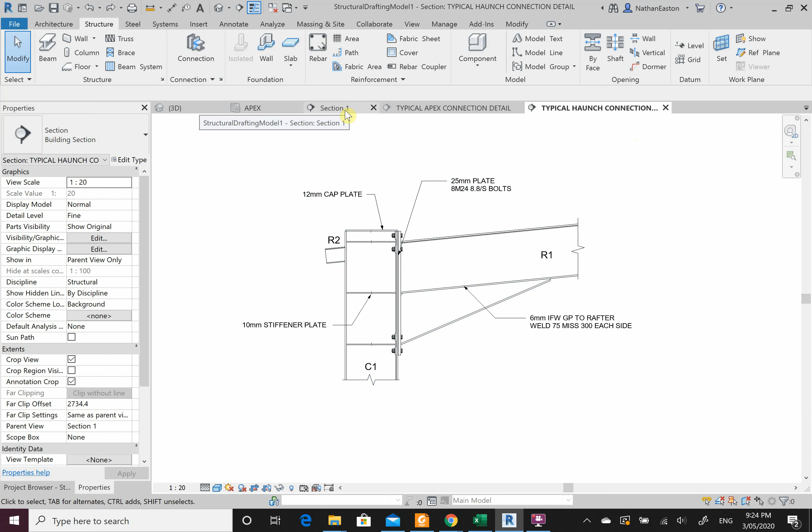So let's come back to our section. I'm just going to rename this while we're here to be our portal frame. Right click, rename - this is our portal frame.

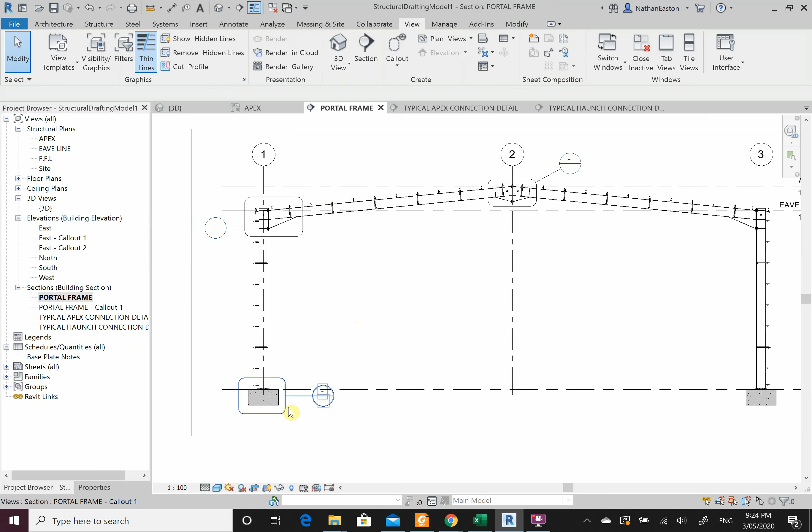Now what I need is a detail about our base plate. I'm going to come to view, call out, and put one around here. Right click, go to view.

What I need to see here is I need to firstly change my scale to 1:20, detail level to fine, graphic display as shaded - just like everything else.

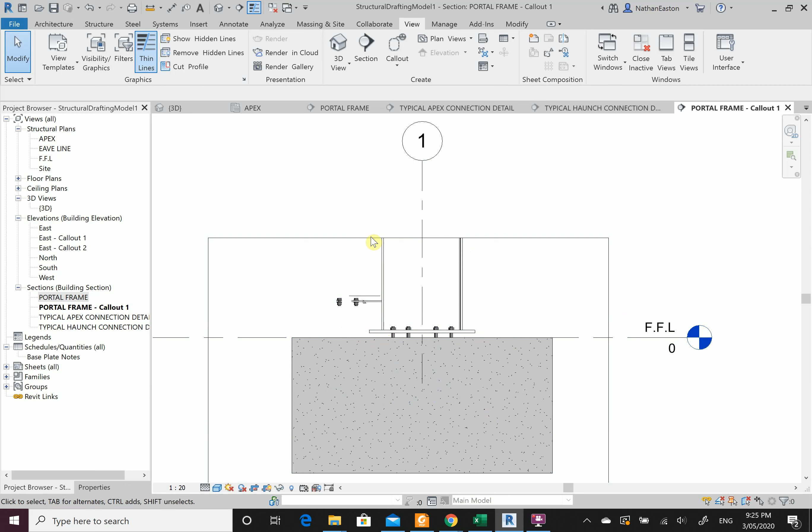Now I don't need to see the girts here. All I want to see is my column, my hold down bolts and base plate, and my pad footing. So I'm going to hide my grid line - I can bring it back and use a center line down the track, we'll get to that after. And what I'm going to hide as well is these girts, I'm not interested in seeing them just yet, they don't add any value to this detail. So I'll just tidy this up.

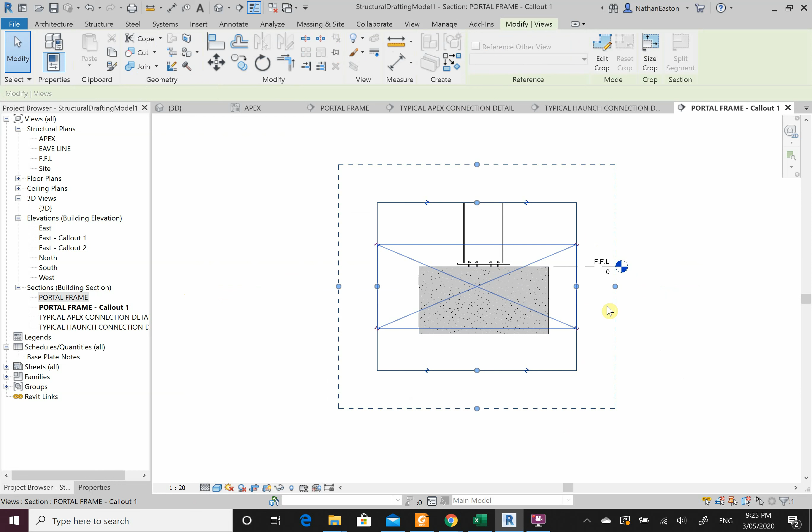Now what I'm going to do is increase my area for my annotations, and then turn off my crop region. So what I need to do is be able to see these bolts through here, and put in some bottom reinforcement.

So I'm going to select my pad footing. Now I know we haven't covered concrete yet, but we'll go through this now, and then get into the nitty-gritty details of concrete in the next couple of weeks. So we can specify structural material, we can put in say 32 MPa concrete - I'm not going to worry about that as of yet.

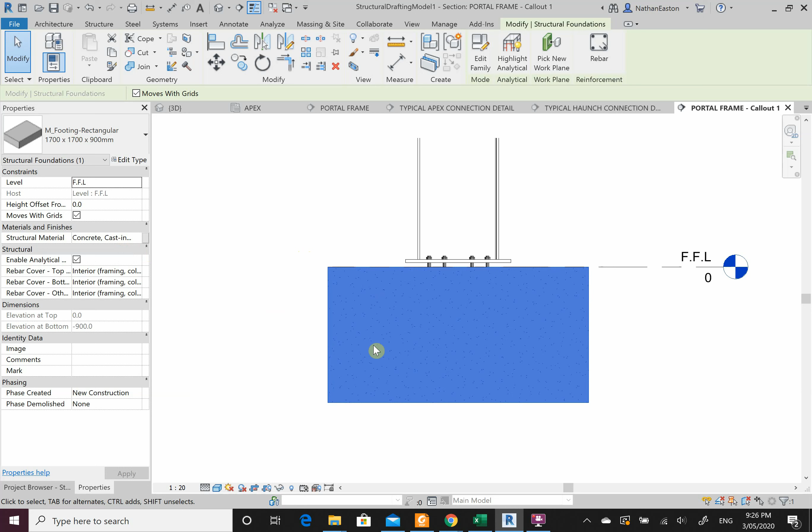What we're going to do is make it transparent. So select it, right click, override graphics in view by element. You can do this from your visibility graphics, so VV or VG, or go through the view tab and grab it that way. Now all I'm going to do is make it a little bit transparent so I can see the bolts. Go OK.

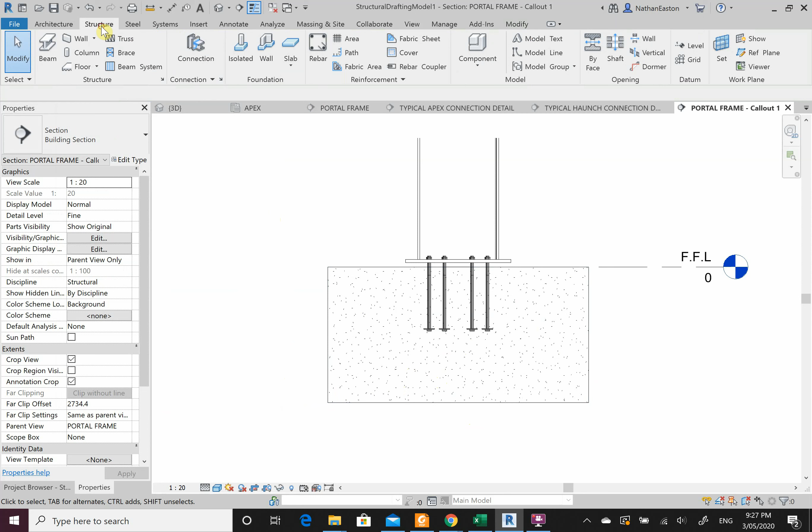And now what I'm going to do is put in some bottom reinforcement in here. This is going to be all under tension, this bottom area below the neutral axis. So I need to go structure, rebar.

Now what I can see in here is I have all these shape M's. So by the looks, I don't have an Australian family loaded in here because I know the rebar shape S is what I'm after for the longitudinal bars. So I can use this rebar shape M for the longitudinal bar, just a round circular bar. But in my properties, what I can see is I don't have my N bars - my N12s, N16s, N24s, N32s. I haven't got any of them. So what I'm going to do is load shapes.

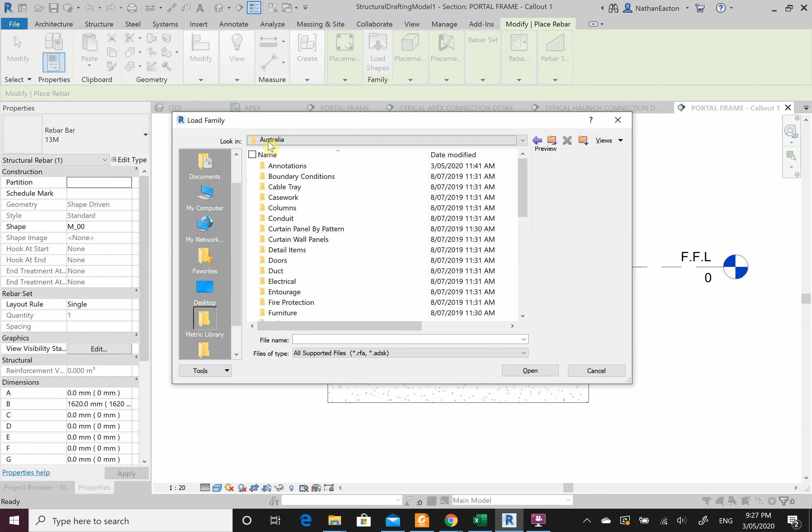This here is going to be Australia. I come down to structural rebar shapes, I'm looking for my shape S. Okay, go open.

And this is okay. So the first thing I want is for the bars to run in the X direction, so parallel, so I can see it like this. Okay, I need to change my properties - I'm after an N12, so N10, N12 bars.

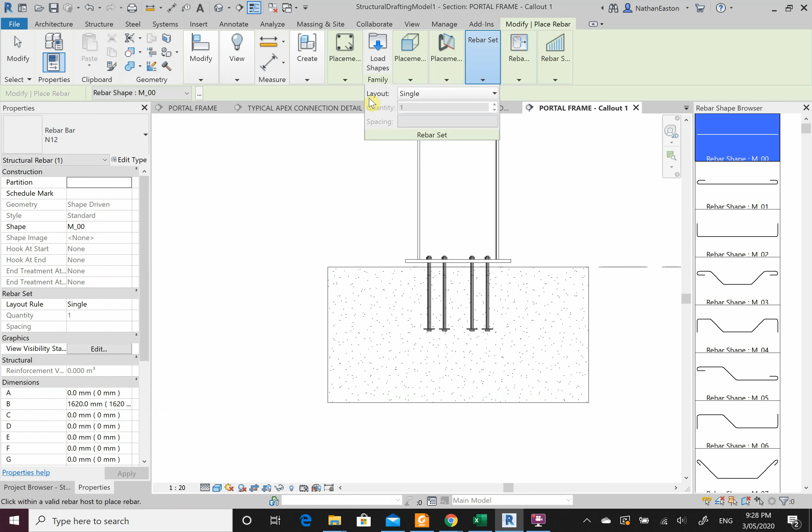Now this will, if I place this here, give me one bar. So I come to my modify tab, go to my rebar set, my layout, I'm going to change these to a maximum spacing, and I want each of my bars to be 150 centers. All of this information will be given to you by a design engineer.

Now I'm going to put the bottom ones here in one direction. Now this is a 3D object, and this beam or this pad will bend in 2 directions, so I need to reinforce it in 2 directions.

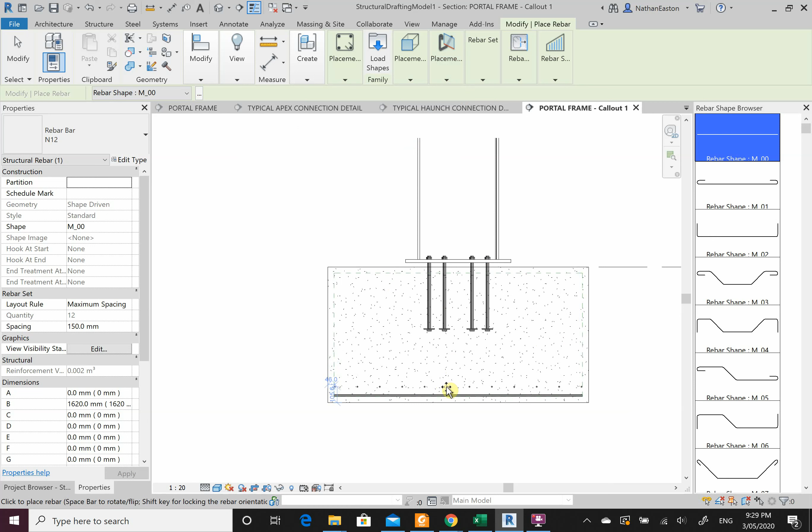So I need placement, and I change my placement orientation to perpendicular to cover, so I can see my bars in the opposite direction, kind of like our slab mesh. So I'm going to place these on top of my bottom bars, and that will be okay - that would be 150 centers in one direction and 150 centers in the other direction.

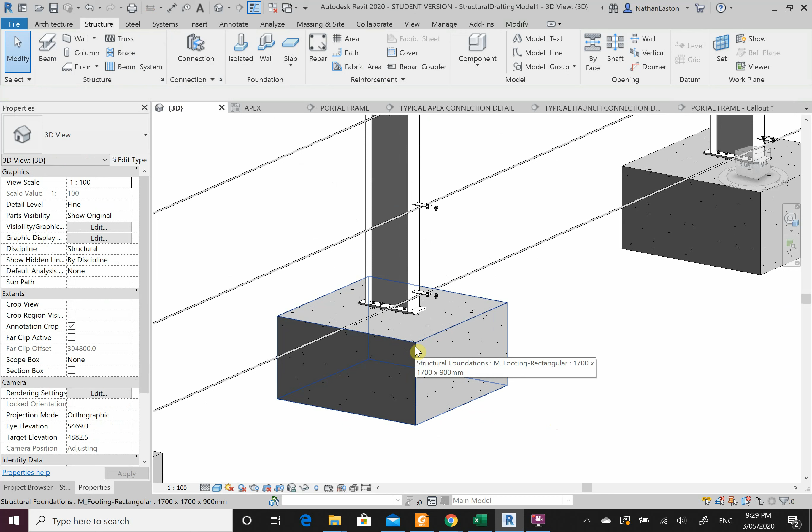So if I come to my 3D view, it should be this footing here. So I'm just going to show you what it looks like. I'm going to make my footing transparent to start off with.

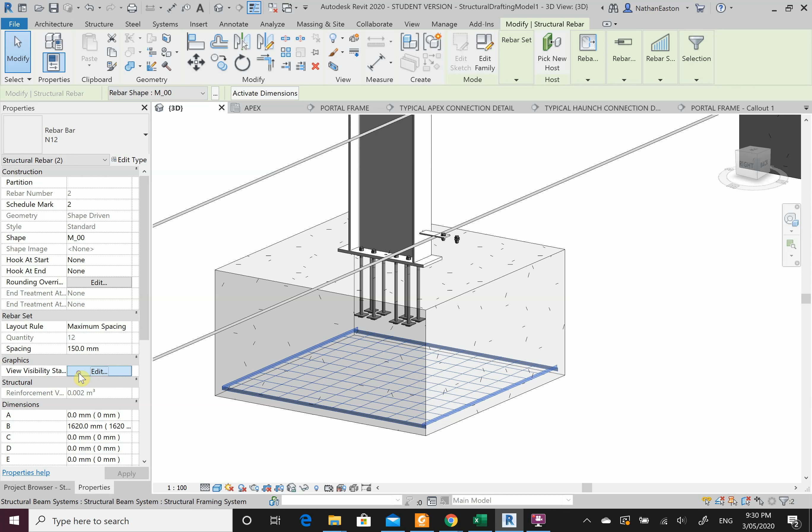And then I'm going to select these bars. Okay, we'll get into this when we do it a bit more concrete, but as we can see, this is very much in 2D, just lines. It's actually 3D bars. We come in the properties, graphics, there's view visibility states, we edit, and in my 3D I want to view as solid and view unobscured.

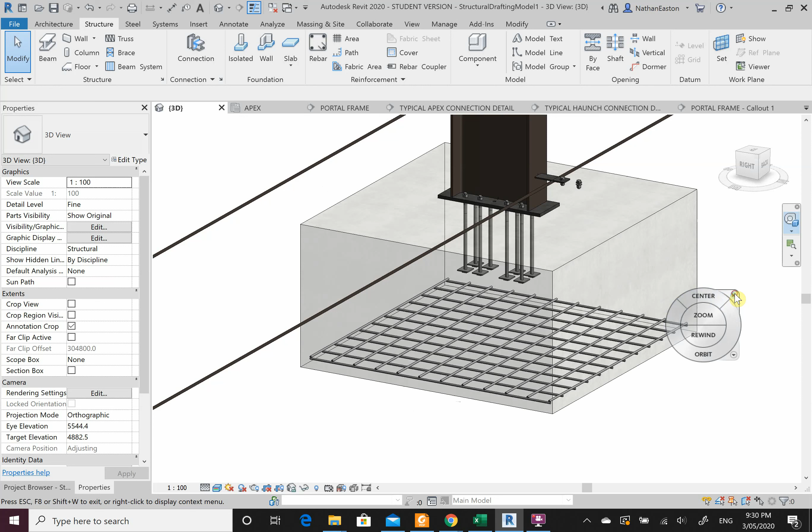Go OK, and now I can see these as an actual grid. I can make it realistic and the bars will show a bit better. So this is how they look in here. So they are 3D bars overlapping on top of each other. Okay. So we can come back to our detail.

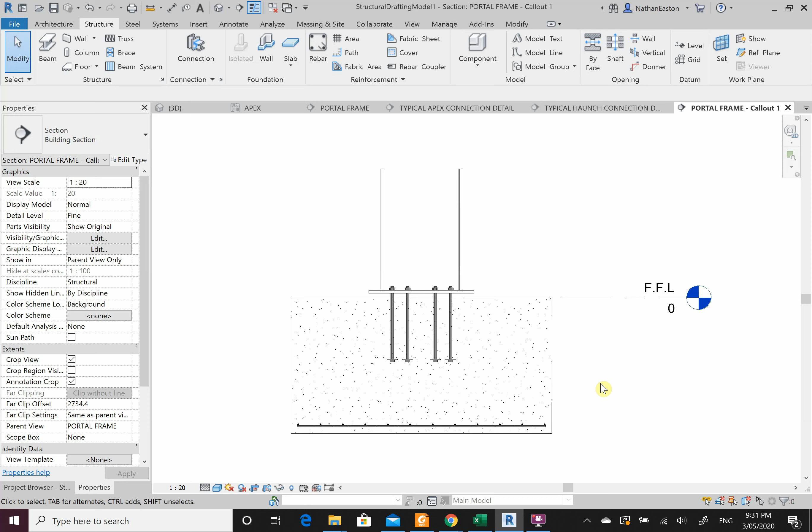Okay, now we've got everything in here that we need to start putting in some text. So this column here is column 1 or column type 1. We will have separate pad footings because we have smaller ones for our second columns. If you remember from our 3D, these pads here is what I'm talking about. These pads and columns are different to these pads and columns.

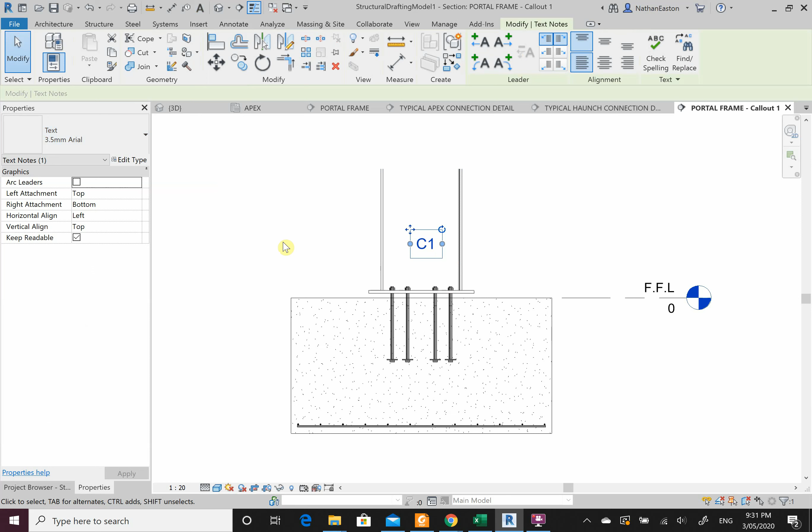So what I will do first is annotate text. And this one here is C1. Okay, and it's also going to be 3.5 millimeters in height. C1. Okay. Now, what I need to do is start to detail the rest of it.

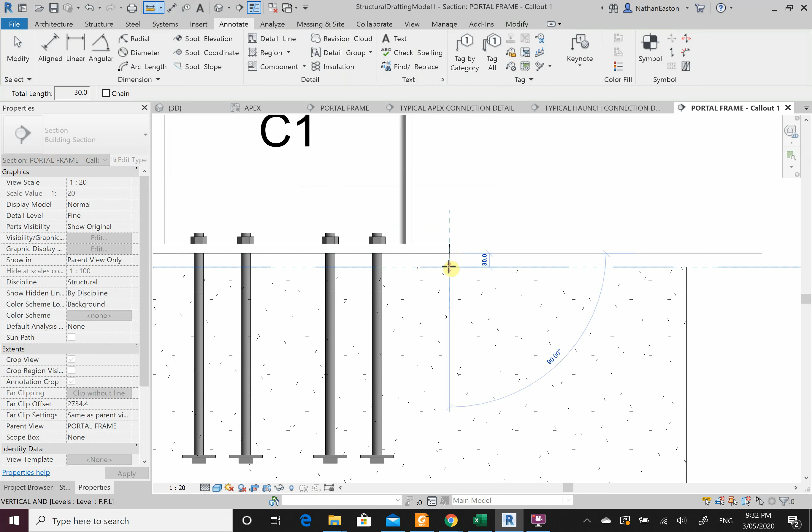So, text. Now, remember we have our base plate, and underneath our base plate, we have this non-shrink grout that we have to use. So I'll just double check. I think we've used 30 millimeters. 30? Awesome. So I will go text, and I have 30 millimeters non-shrink grout. Okay, I'll move that up a little bit. I'll put a leader to the left, and my non-shrink grout is sitting down here.

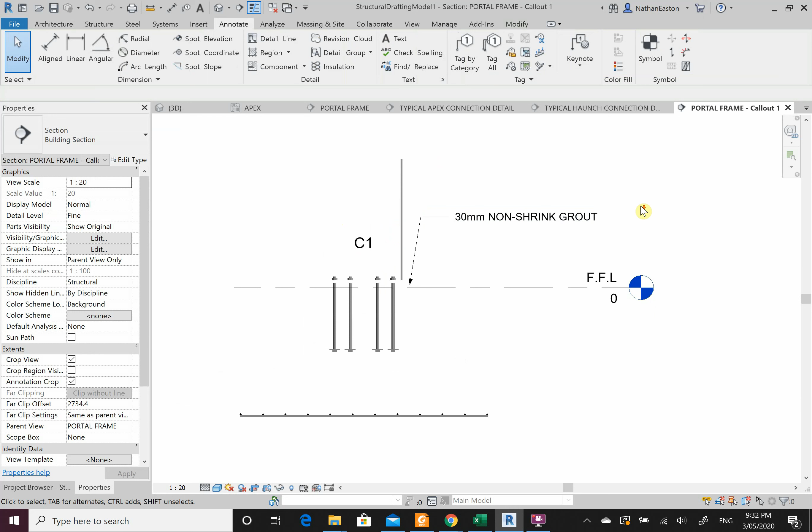Okay. My base plate, which is here. If I go tab, I can pick the actual plate, check my thickness, it's a 20 millimeter thick plate. So TX, what I have here is a 20 millimeter base plate. Leader to the right, and that's this plate here that I'm talking about.

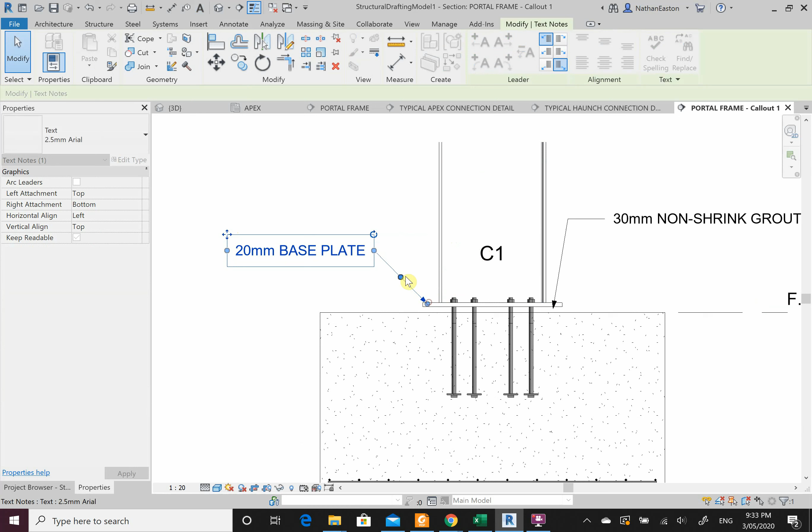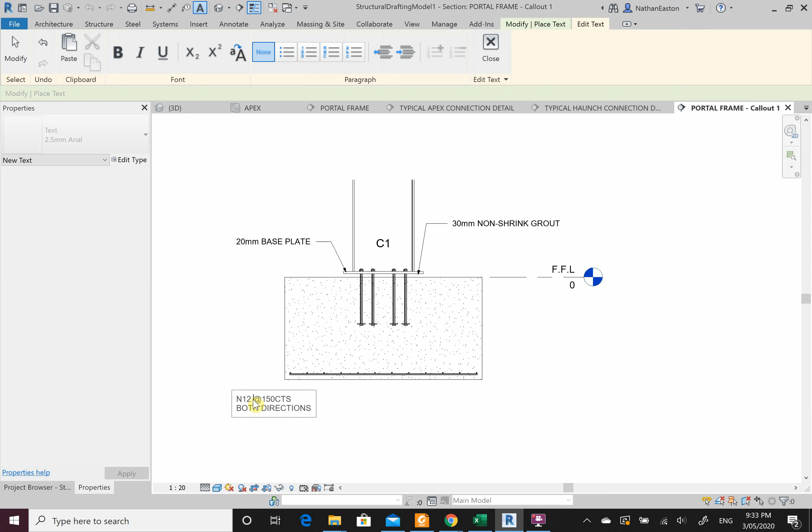Awesome. So the next thing I want is I might specify my bottom reinforcement here. So TX, and I have N12 bars. They're 150 centers, and that's in both directions. Space there. Okay. So select my text, leader to the right, and that's these bars here that I'm talking about.

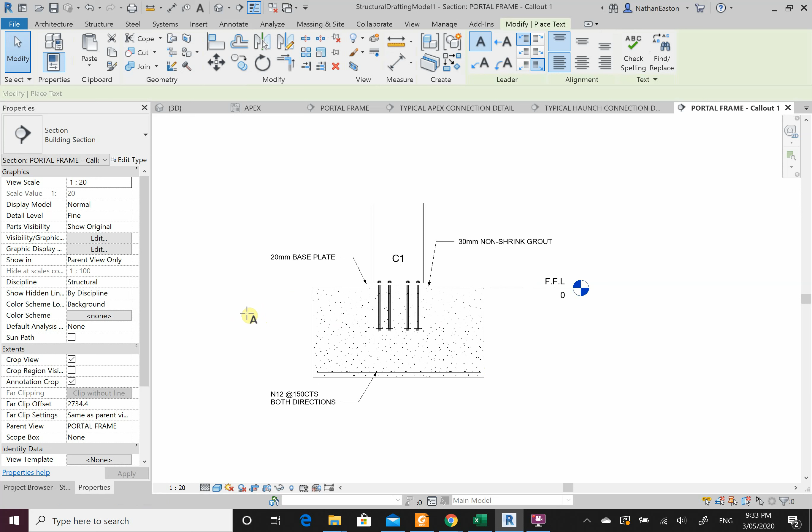Okay. Now, the other thing that I have to specify is my pad size and my bolts. So I might put the hold down bolts over here. So TX, and what I have here is 4 M20. Now remember, these bolts are different. We use non-structural grade, so we use 4.6 grade bolts for our base plates because high tensile strength bolts are good in tension, but if you try to move them as they're set in concrete, they tend to snap.

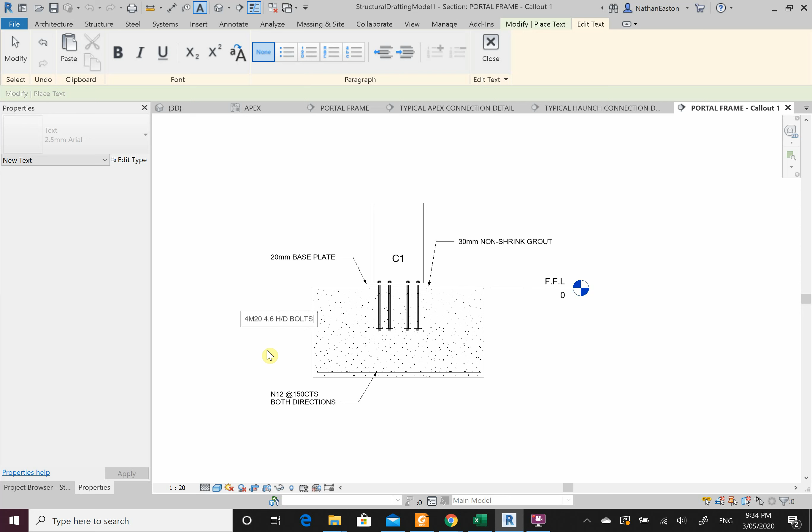Okay, they're very brittle. So we use 4 M20, 4.6, and these are our hold down bolts. Hold down bolts. Okay, I'll just move that here, lead it to the right, and that's these bolts here that I'm talking about. I try to keep everything straight when I'm annotating. We don't like to have curvy lines anywhere.

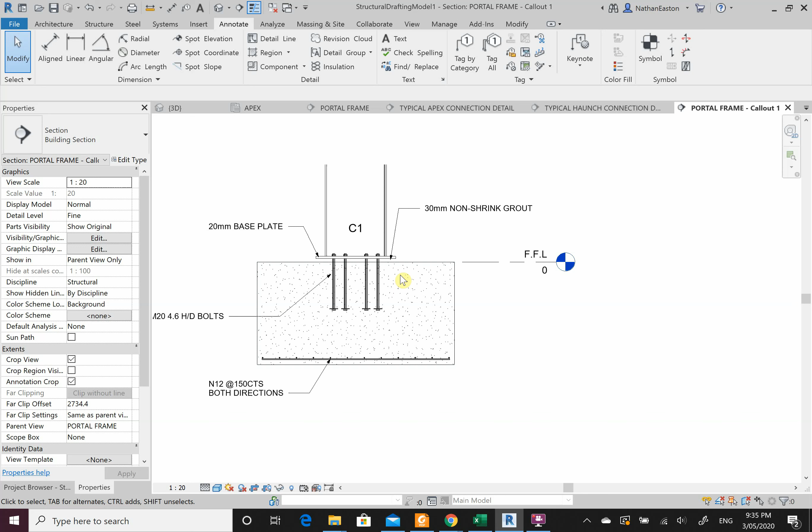And last but not least, we have our pad size, and then we have to put in this break line for our column as well. So text, and this one here, I'll just double check. Sorry, I forgot to check the bolts. So tab, check the bolt. It's a 4.6 M20 bolt. Awesome. And the pad is 1700 by 1700 by 900.

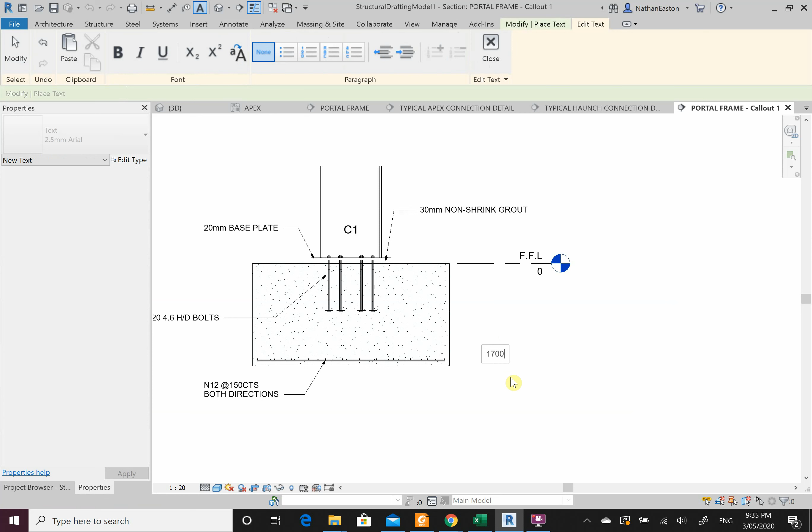Okay. So text, our pad footing is going to be 1700 by 1700 by 900 pad footing. Okay. We can specify the concrete grade and things like that in our notes elsewhere.

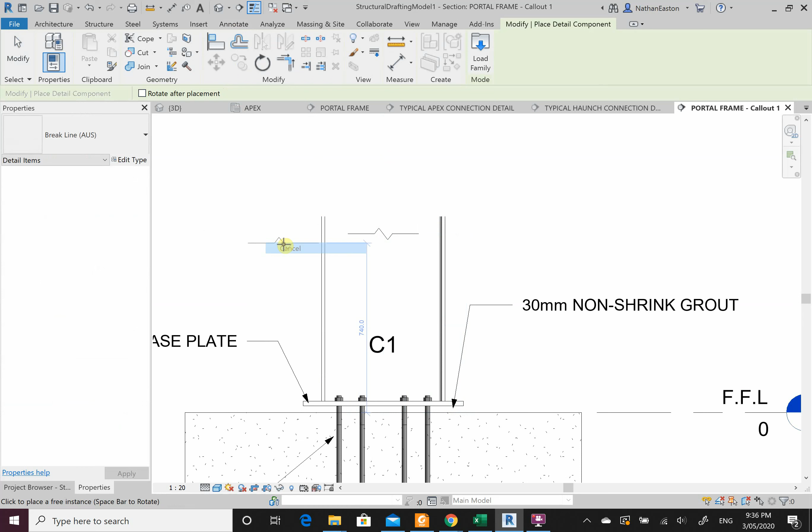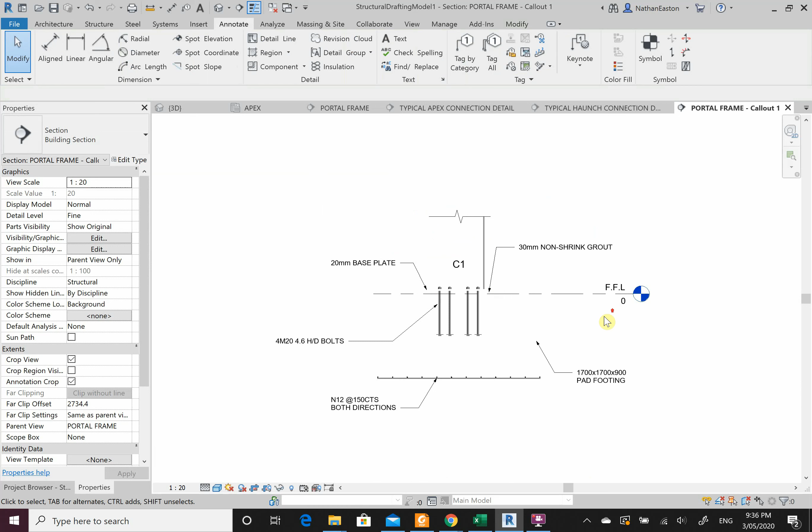Last but not least, we have our break line to put in here. So annotate, component, detail component, and this one here. Okay, notice I didn't rotate after placement for this one. And I will just tidy it up just like we did before, just so it looks a bit more proportional to the rest of our drawing. And I might just increase that a little bit, just push it a bit further up. Awesome. Okay, just a little bit of final tidying up.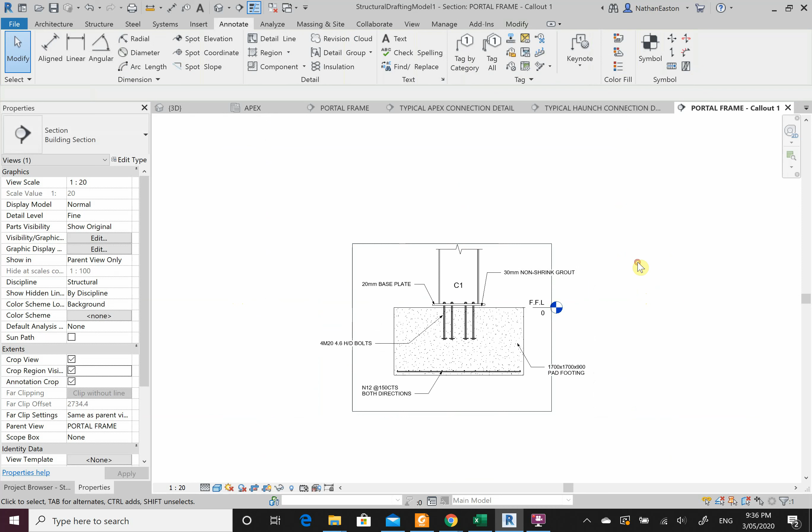Now that looks alright. Now I can check how I went with my annotation crops, and I can pull them back in if I need to. Oh. And then that one comes down. Alright, my crop region undone again, and that is our base plate detail for our column 1.

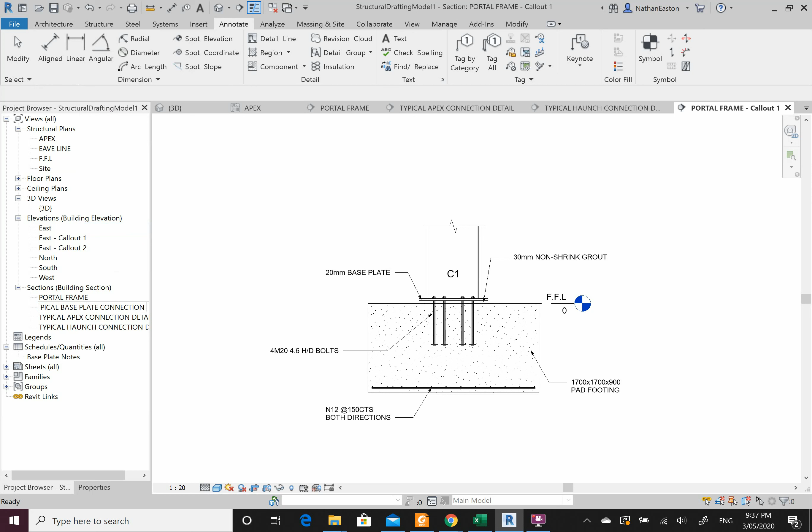Okay, so portal frame, rename, this is going to be our typical base plate connection detail. Okay, so that is how we do this one here.